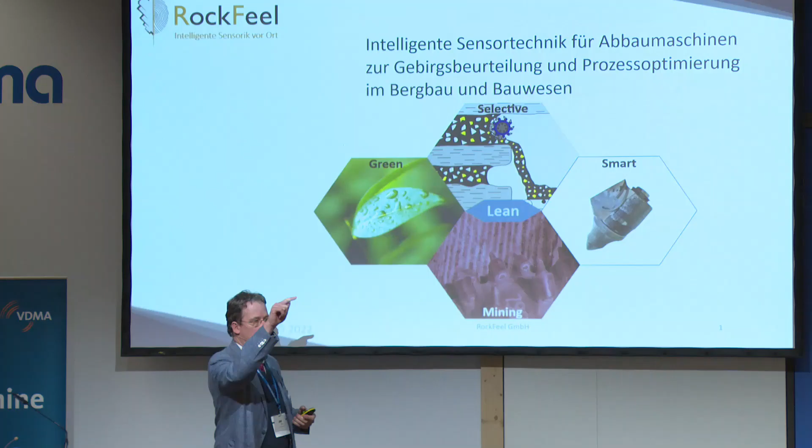Well, actually, these are very hard conditions, and normally industry didn't believe that we would manage that, but we actually found a way. We developed a solution, a contactless sensing solution for these kinds of picks, and this contactless sensing solution had to be proven. First of all, does it work? Does it provide data at all? Can we use this data, and does it survive? That's actually what we did in two years of operation as a project team, and now one year as a founded startup company.

So I would like to show you—maybe we can go a little bit here and find something I wanted to show you either way.

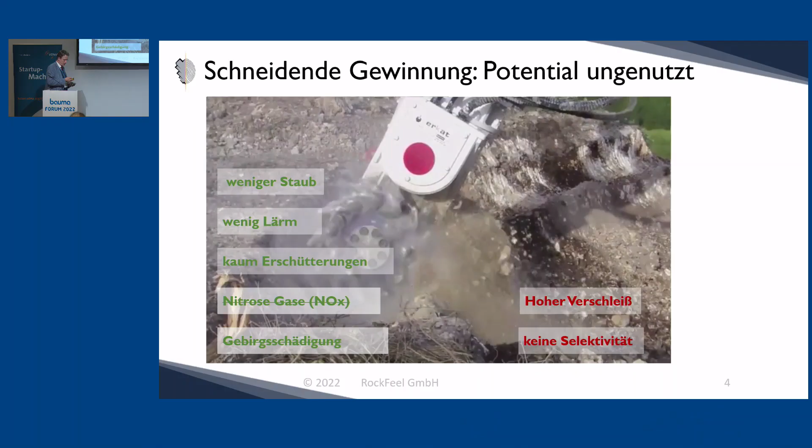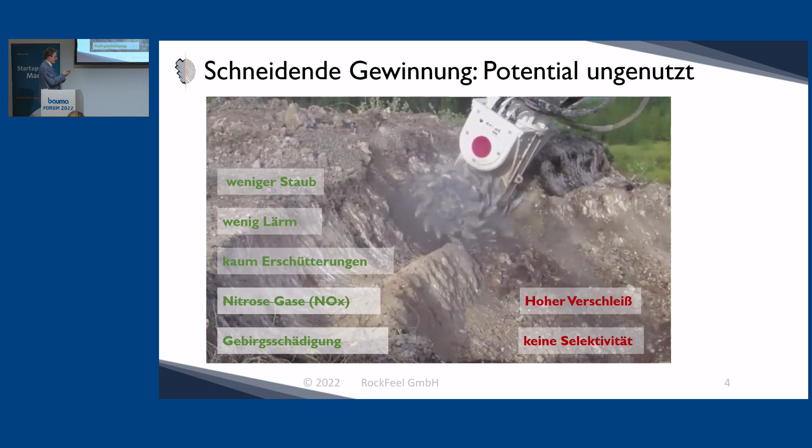Of course, the advantages of cutting, I would just go shortly about it. We have less dust, less noise, less vibrations into the ground, less damage also to the bedrock, and this is also a safety problem. And of course, we have no material going, no poisonous gases going out from that process. It's a process which is more friendly to the environment. We have one big problem, which is high wear on the tools, and most of the time it's very limiting the applicability.

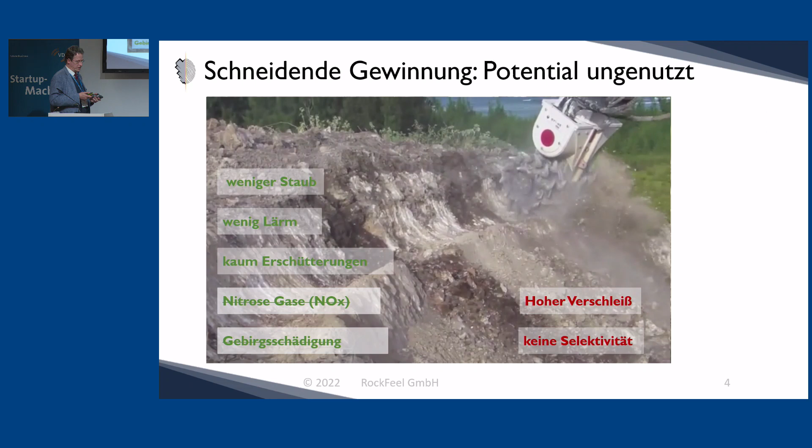Well, and now I see we had the right presentation. Maybe you change on that. Thank you very much.

So everything on that I already told you, and I will try to explain how we can make a contribution to these very ambitious goals to see a more efficient, sustainable, and reliable mining in the future. Cutting in mining is done with tools like a cutting machine, an excavator, with a cutter head with many picks on it.

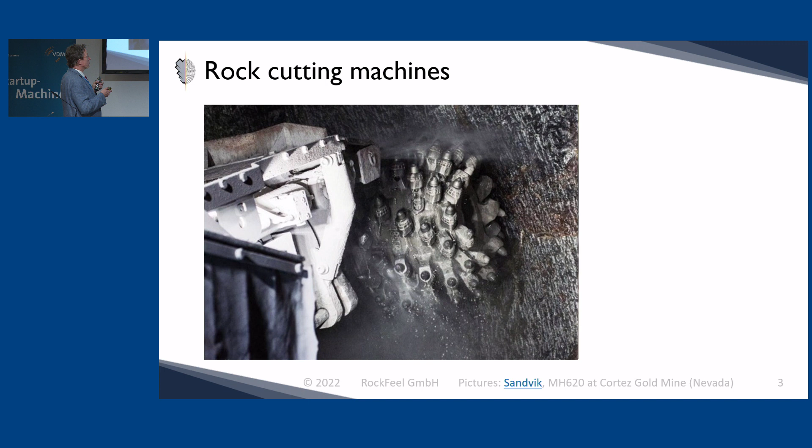These picks are in very rough contact with the material. They are very hardly sustained. We want to address the problem of high tool wear, because normally a pick will get worn out. The problem is these picks must be movable, changing position all the time for normal wear. But if you have a blocked pick, this will get destroyed in maybe some minutes, and operators don't recognize it early.

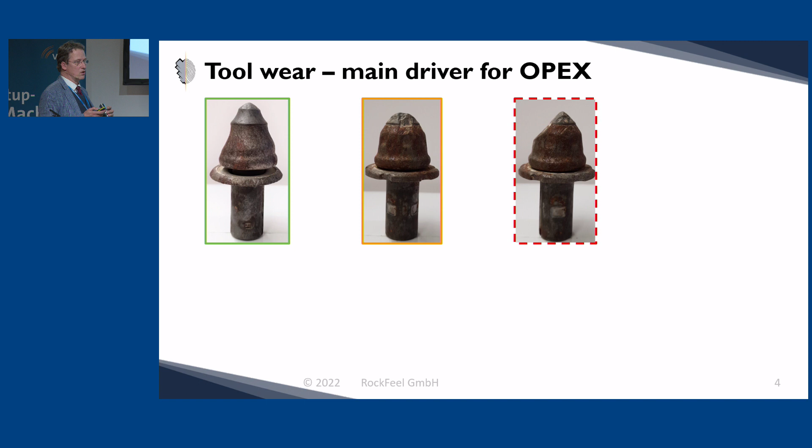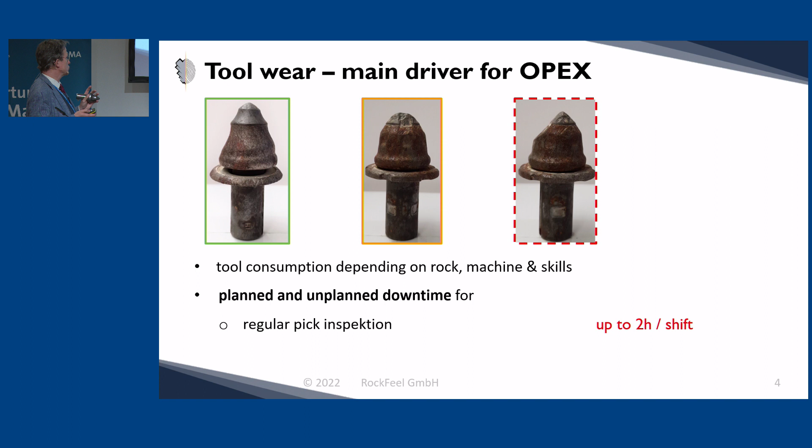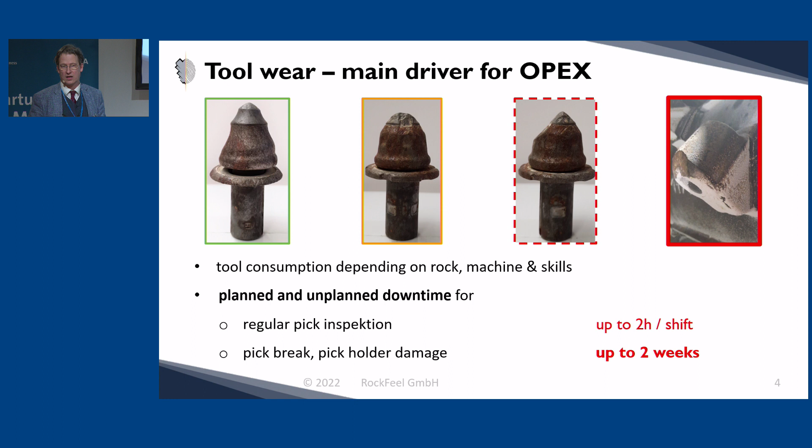If we have a sensor which could detect this condition that the pick is blocked, the operator can get an early warning and get out of it. We have many functions which drive up the costs of these picks, and a big part of it is planned and unplanned downtimes of the overall machine. First, regular pick inspections, which is a daily business. But if something breaks down, you have maybe days or weeks of downtime, and that's very costly, especially in tunneling applications. One hour can cost up to 30,000 euros.

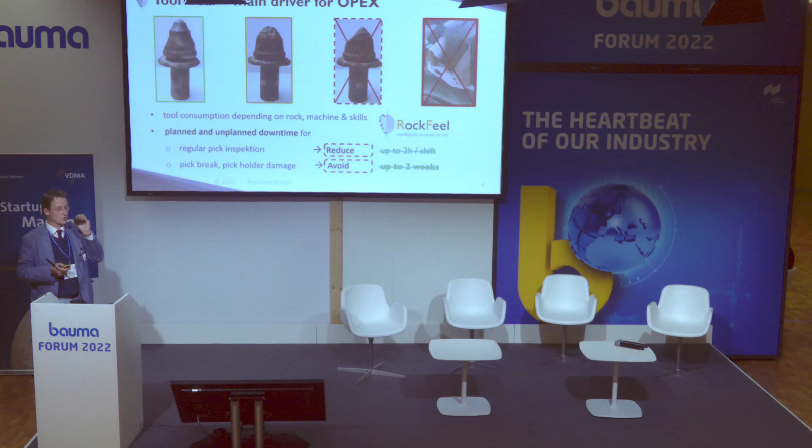So it's a very interesting thing to avoid this, and this is what we're trying to do with our RockFeel company, with our approaches. We want to reduce the regular pick inspection, because if you have constant feedback from your picks, you can say we can wait a little while, or we must change earlier in order to have regular operations. And of course, if we avoid accidents and grave damage to the machine, we can completely avoid these hazards. This is how our system looks like.

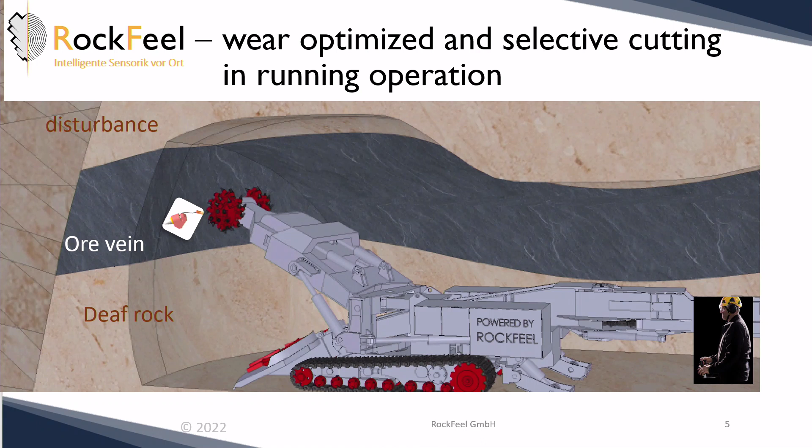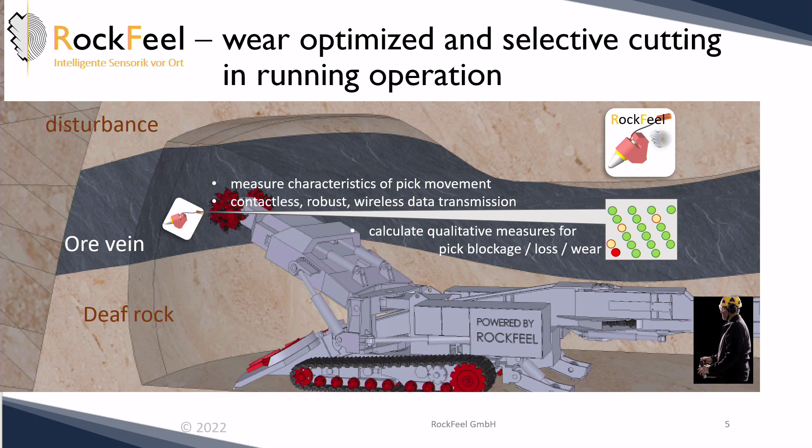We have our sensor on the cutter head, and this sensor is constantly measuring characteristics of the pick movement. You can see it on our booth 502, we have it actually in operation there. It's a contactless system, very robust. It survived 50 hours on cutting concrete already, and it's the system we are presenting there.

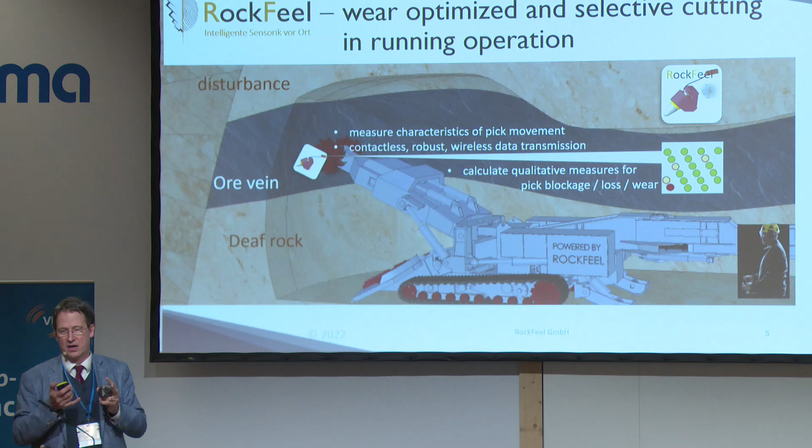We have a wireless data transmission to a PC or something like that, which then will calculate qualitative measures - think of it as some KPI for pick blockage, pick loss, and pick wear - and we can then monitor and visualize that for the operator.

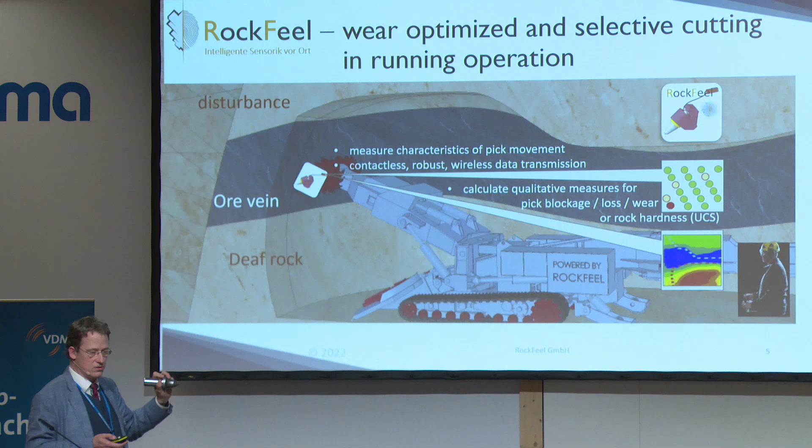Another application which we first wanted to go into was selective mining. We can see differences in the reaction of the picks if the rock hardness is different while cutting, and then we can transfer that into a kind of map of the face and say, operator, you are here in your ore zone, and this other zone where the material is not so rich in ore.

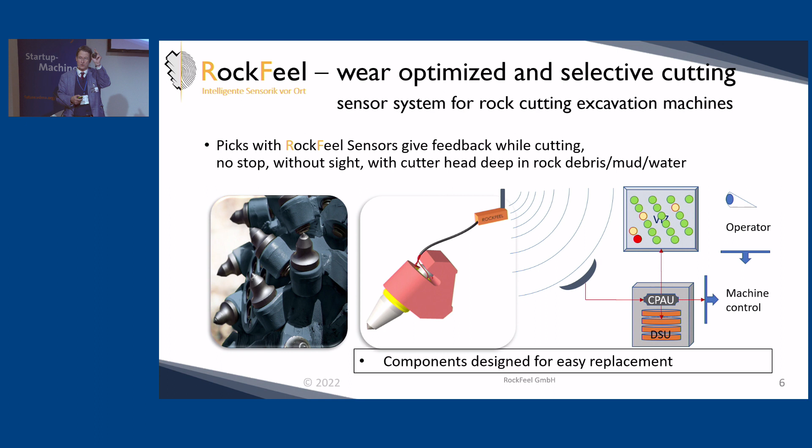The system consists of typical components for such a system: the sensor on the pick, some pre-processing for the data transmission, calculating of the values, and then visualization for the operator in the first place, but if you look at the future, also for an autonomous machine control.

So how did we do it? It's just a journey, I want to take you a little bit with me. We had a testing rig which has one pick stationary installed, and we can move a probe below it. This has been done many times before - just recording the cutting process with a camera, measurement of cutting forces, learning many things about cutting.

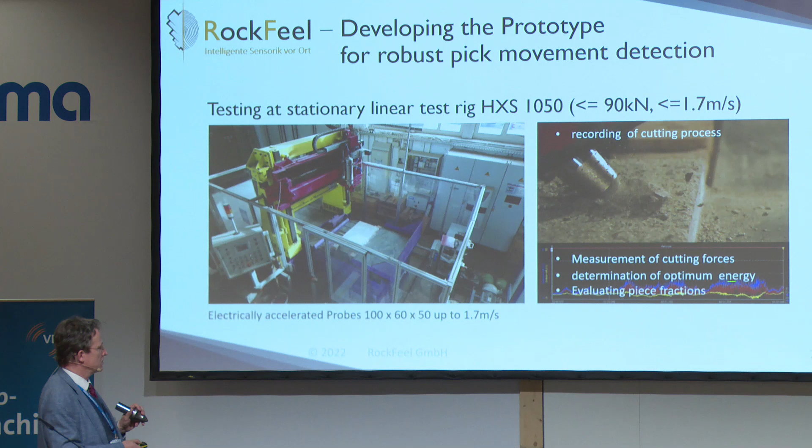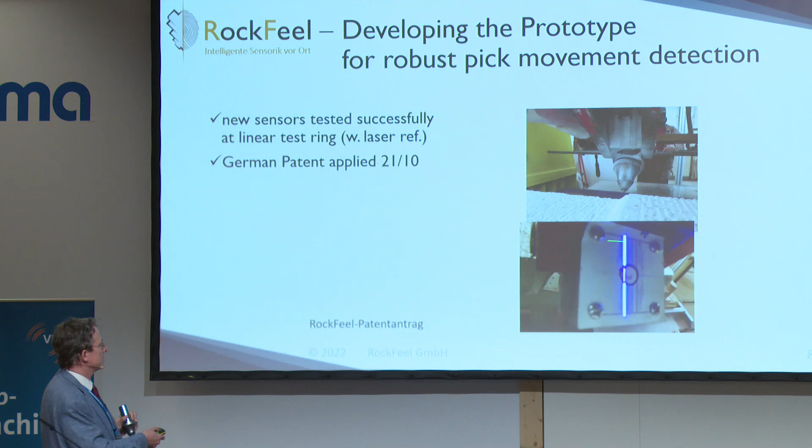What we did newly was not just what is classically done, but we measured the movement of the pick in its holder. That was the new part, and we had to apply different sophisticated reference sensors for it, especially a laser system which had to be hung up on a crane in order to work properly.

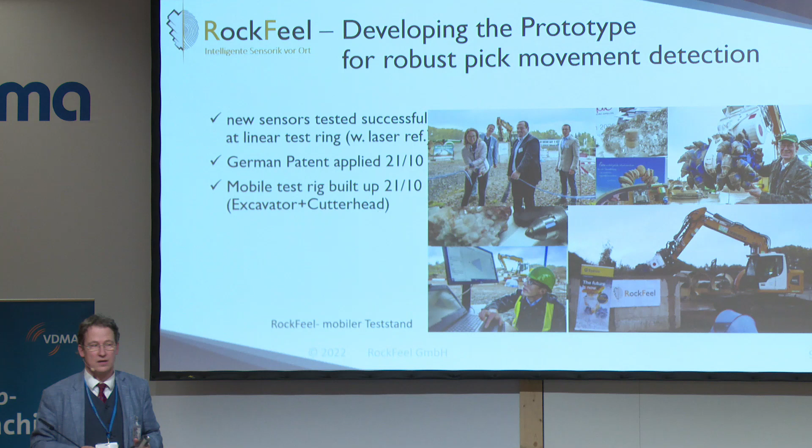After we evaluated our approach, we wrote a patent, and we started building up a mobile test rig with an excavator and a concrete block and a cutter head on it, and put our sensor electronics on this cutter head.

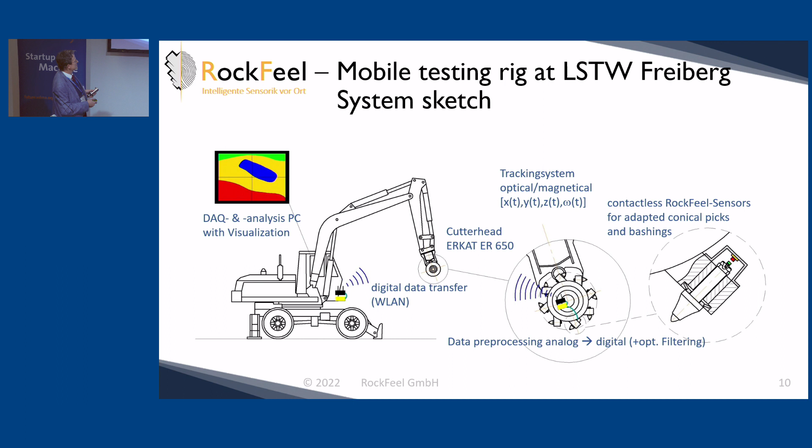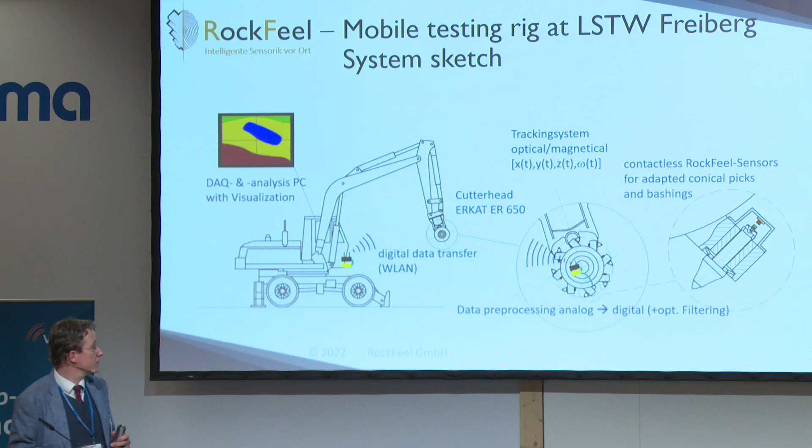And actually, the system looks like that. You have the excavator, you have the cutter head itself with some additional sensors on it, and we have the sensors itself on the picks, and then the data transmission to our back end. And all this you can see on our booth. This is how it looks in reality.

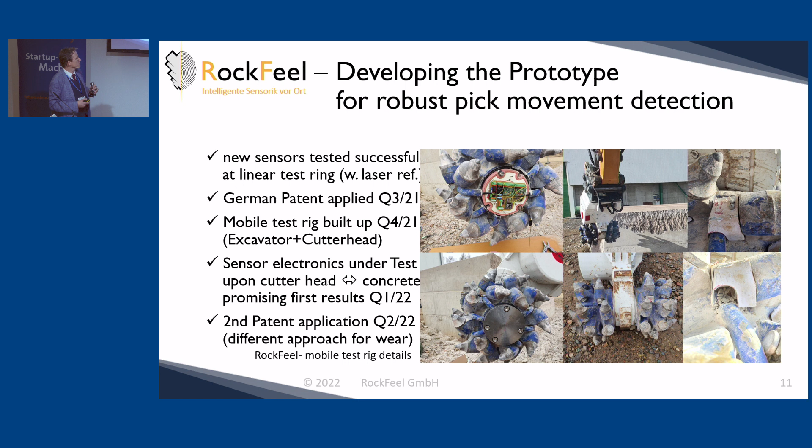Of course, after 10 minutes of cutting, the new cutter head is looking like that. It's actually a very, very wearing process. This was the starting phase, and we had this under test for quite a long while. And you can see for this moment here, how it works.

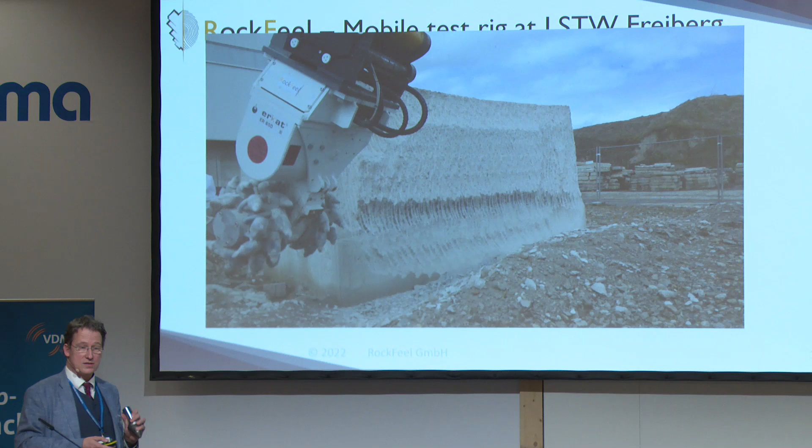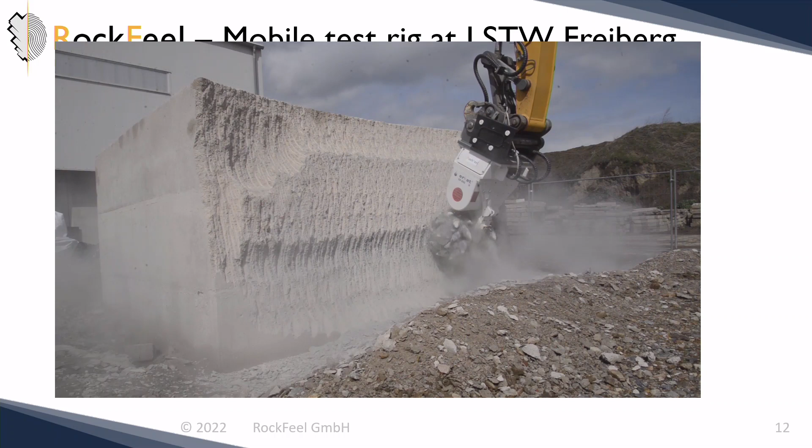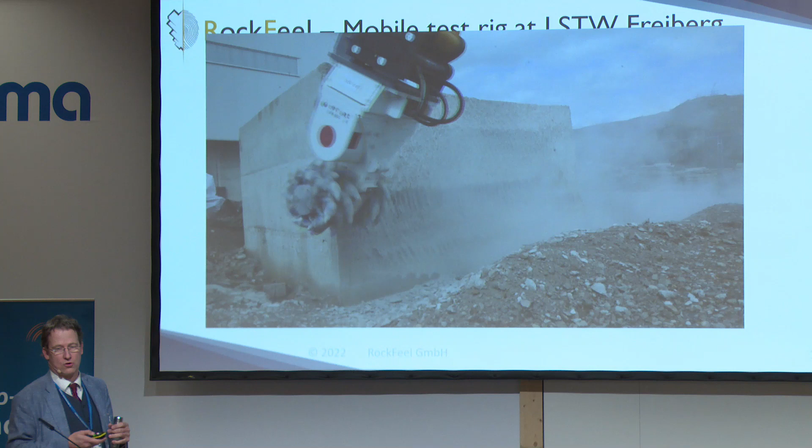Yeah, actually, our results are very promising. We had no downtime of our sensor or of our system after 50 hours of cutting operations. And we had the patterns which we expected from the physics of the breaking process in our data. So we will very well go on.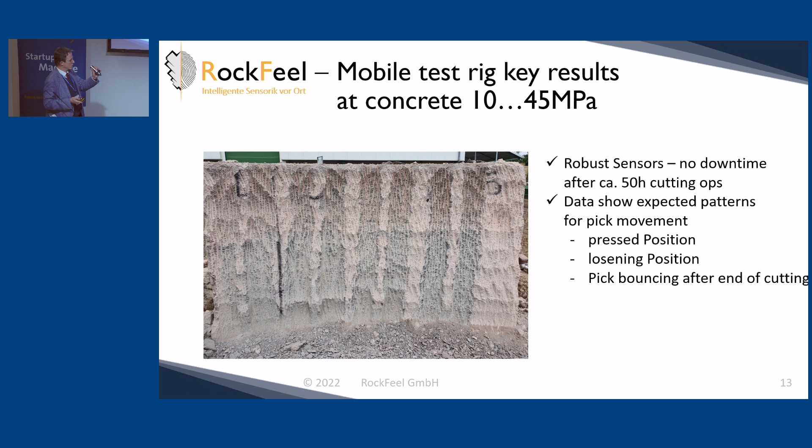We have certain data for these different positions for the pick. We have the pick bouncing after the pick is leaving the rock, and we also see pick rotations. And this is what nobody else has done before, so we think many good things can come about it.

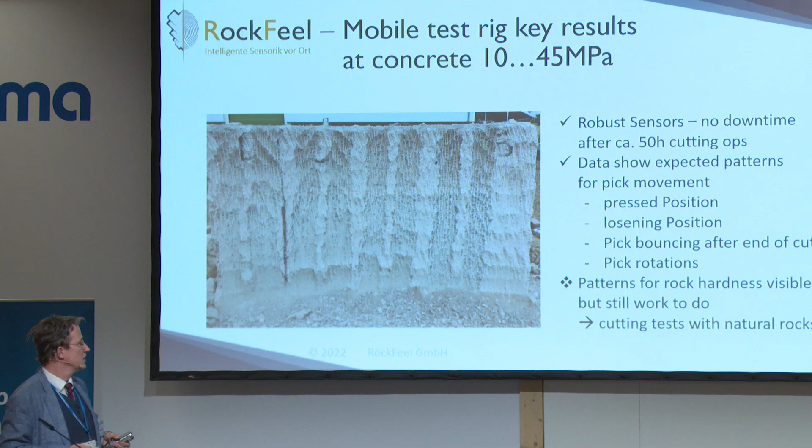With the rock itself, it's not so easy because the concrete we used has very hard rock in it in very small grains, and they put a little bit of noise on the data. So our next step will be to go outdoors, go to the mines, and cut there. We'll start next week actually in a porphyry tuff mine, an open mine, and very soon we'll go to a salt mine underground and test it there.

And that's just my summary of what we can do technically, that's on the left side, and what we can do for the process of mining on the right side. So we are hopefully happy that we can help in wear optimization and process optimization in excavation.

Another application I didn't mention so far was warning of unstable material ahead, because if you're cutting through bulk material and then you get an unstable zone, of course the picks will react differently, and we hopefully will see this pattern also and then send a warning to an operator: wait, take care, there can be material coming down, so you have to take care for yourself.

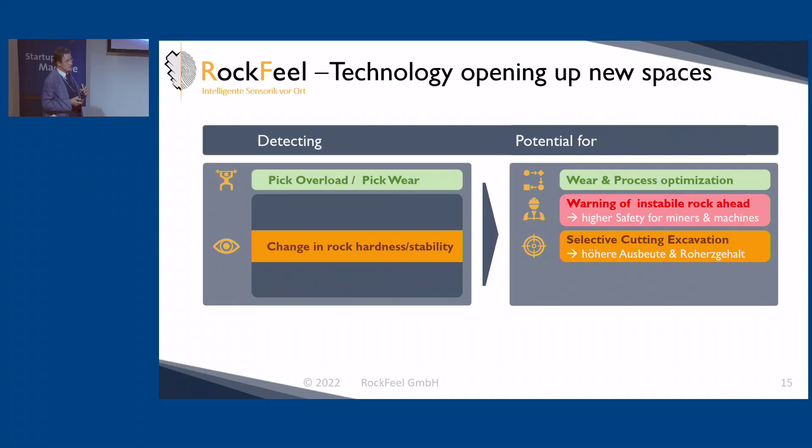Of course, selective cutting excavation. Recently, we had many feedbacks from industry where this can be applied. It's not so well known already, but it's growing, and we think there's some future for excavation, especially in Germany, where we have many small deposits which are not economically viable so far. But if we have selective cutting excavation, we can do this mining very well in our environment in Germany, in Saxony, especially where we are coming from.

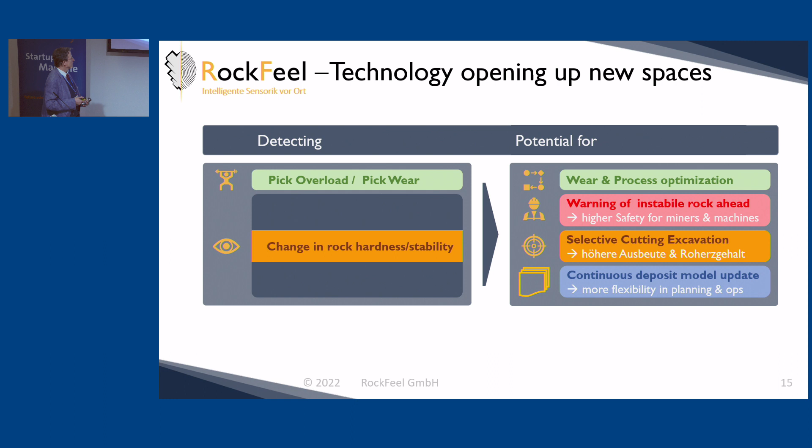And on the far side, looking for mining 4.0, we can say, well, if we can get continuous data from the face and from the material we are cutting, we can also put this data in a more broad scheme and bring it into maybe a model update for the deposit model for the mine operations, or any other applications for autonomous operation.